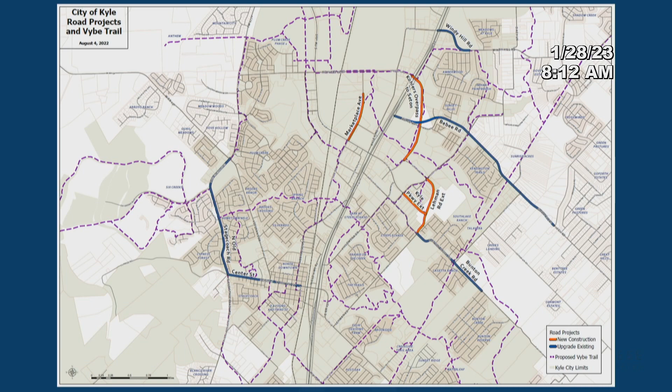And then we always show this map, and you can see that the blue lines, the blue projects, are the ones that involve upgrading existing facilities, and the orange ones are what we call greenfield or new construction projects. It's always a good reminder, we think, to show how the projects are distributed throughout the city.

So again, since the bond passed, we were waiting to talk to council, and we're not doing a whole lot because the feedback we got was that you wanted to engage and review everything. But there were things we were able to do and keep working on that didn't take a lot of time or effort, that would put us in a position to start quickly once we all agreed it was time to move forward. One of those things was we continued to work with the design engineers — those firms selected to do the actual designs — on the draft scopes and fees for the projects.

Now, those aren't complete, but we've gotten them to the point where, depending on the direction we're given today, we'll be able to complete those quickly, bring them back to council for review and approval, and this way we're not losing any more time developing scopes and fees.

We also started putting together a draft master schedule based on the initial project scopes, and we'll finish that once we get started. We'll come back, probably during a regular council meeting or workshop, whatever you all decide, to show you how the master schedule is laying out and what you can expect in terms of not only each project, but also the program as a whole — when projects will be through design, when they'll go into right-of-way and utility coordination, and then when they'll go into construction.

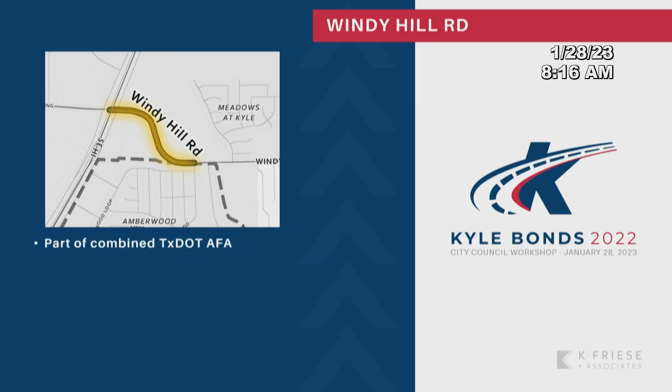Yes, please. For clarification, is Joanne here? I just want to make sure we have the right scope, because I believe from Cherrywood to Purple Martin was already worked on by the county, and Joanne worked collectively with them, so I just want to make sure we're budgeting for the right amount of road.

Sure. Part of what I should have mentioned is, after today, assuming we move forward, we're going to go through and double check all the scopes and limits, and just make sure everything is where it should be. There are lots of moving parts that have nothing to do with any of us that we always have to go back and regroup on, recycle on. Thank you. You're welcome — nope, I went too fast.

So that was Windy Hill, and now we're going to move to Marketplace. This project is going to connect the northern and southern segments of Marketplace Avenue. The existing segment from 1626 to Old Bridge Trail is going to be improved to match the new piece. That new piece will have 2 12-foot lanes in each direction, a median, and sidewalks on either side. The budgeted cost for this project is $11.2 million.

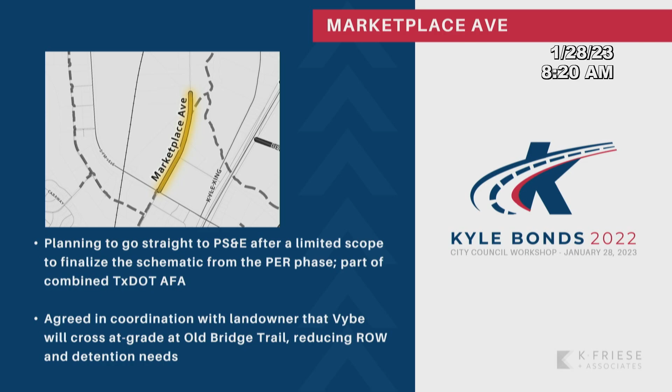This is also one of the projects where the property owner reached out to us and wanted to understand a little bit more about the specific elements of the project. And we sat down with them and worked through a couple of things and figured that it would be best for the project if the Vybe crossed at Old Bridge Trail, because that would reduce the right-of-way needs and the needs for detention of water.

And so we are a little bit ahead on thinking through what this final scope would be. And again, when the city has figured everything else it has to figure out with projects like this, we'll be ready to move forward with that. So again, this is purely from a road point of view. This does not involve any of the underlying land use decisions that will be made.

But the path forward for this project would be to make sure that we try to address water quality. It is not necessarily a requirement in this particular area, but city staff has indicated that they'd like to see if we can build some water quality features into the project. And we want to make sure that city-owned utilities are in the scope. They were included in the cost estimate. We want to go back and make sure that they're included in the design scope and fee for the design engineer. Again, it's an example of all these things we need to tidy up as we go and finalize those design scopes.

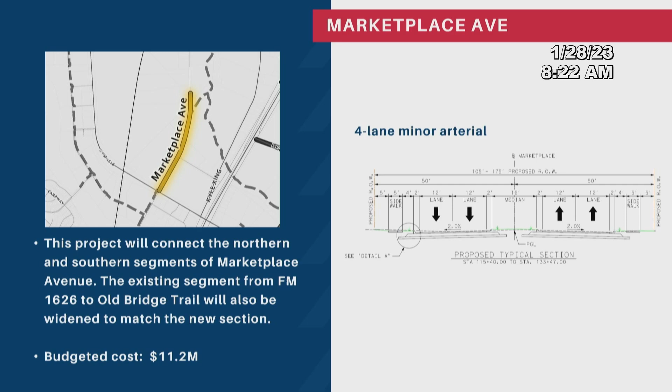Quick question for you. Yes, sir. Just looking back at that Windy Hill, the curvature, is that just a sketch, the way it looks? Will it actually branch a little better, I guess, Y into 35? They're going to laugh because I'm going to use the word idealized. Yes, it's more or less a sketch. The current preliminary engineering report, the current schematic, does have that curve on Windy Hill being made better, being straightened out somewhat. And that will depend a lot on when we begin coordination with that specific property owner. But it does include a somewhat straightening out of the roadway.

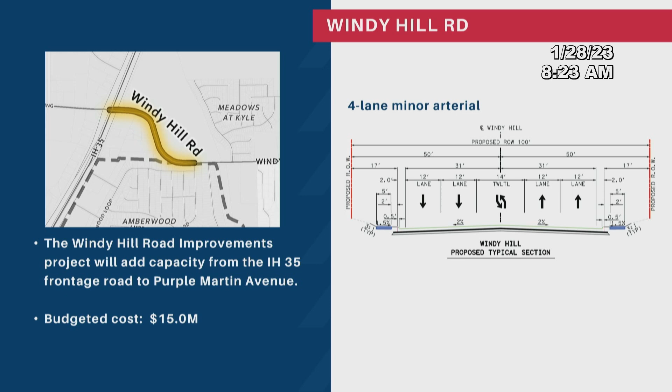And that's actually part of adding to the capacity. When you can remove things like nasty curves, it helps preserve and beef up the capacity a little bit. It's not as good as widening it, but it helps a little bit. Okay, and then it doesn't have sidewalks because, why? Yeah, there are two 5-foot sidewalks. Oh, there are? Okay. And I should have mentioned that, and I apologize. It didn't have it on the sketch. But then we can assume those are sidewalks. Right. Okay. So you'll see that 5-foot strip, and then on others, you'll see a 10-foot strip, and it'll say SUP, which is a shared use path, which is the Vybe.

So next, I'm going to move on to Kyle Parkway, the Lehman Road extension. So this is actually, you can see from the diagram, two pieces, right? The first part of the project extends Lehman Road from Bunton Creek Road to Dacy Lane, and it extends Kyle Parkway into the Lehman Road extension. And the budgeted cost for this is $42.3 million. And you can see that there are two 12-foot lanes, no center turn lane, and then there are two 5-foot sidewalks as part of this project.

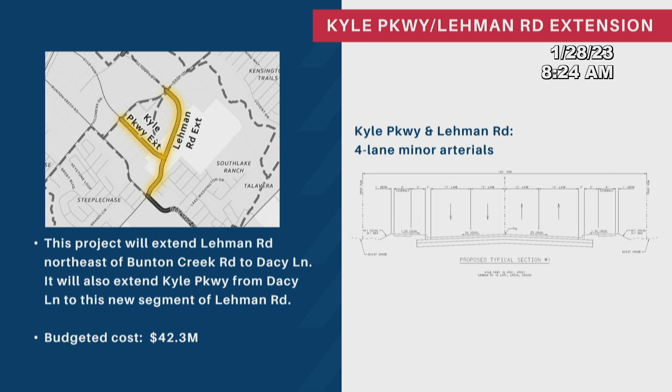This is another project where we believe it can go straight to PS&E. And again, it's a little bit of a cleaning up of the schematic work that was done in the preliminary engineering report. But we don't have to go through the full schematic phase. So again, some savings in time, some savings in money.

And this is a project, and there are a few like this, where the Alliance Regional Water folks are planning a big water line to come through the city and to serve the city. And there are several areas where the ARWA water line conflicts potentially with the road bond projects. And so one of the things we did a couple of weeks ago was begin a conversation with ARWA. Now, luckily, they were aware that the city was working on a set of bond projects.

They were aware that some of the projects would be in areas where they wanted to place the water line. So what we learned is we have some time to better coordinate with them to see how you resolve the conflicts. And in some cases, they understand that they may have to move their water line a little bit, shift it. And in some cases, we might modify how the road crosses the water line or the water line goes under the road. But this is one of the projects where we don't want to wait too much longer because we don't want to hold the ARWA folks up, because that's important to the city for a whole bunch of other reasons.

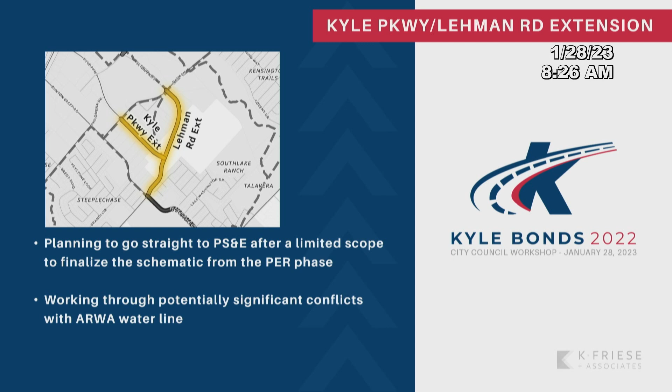So there were two alternatives prepared for this, and you really got to look at those diagrams to understand. But what we're going to move forward with, unless we get different advice, is we're eliminating alternative one, and there is no real big difference in terms of how those two alternatives will ultimately function. There is a little bit of a difference in the alignment and where the roundabouts are placed. Again, it doesn't change the nature of the project or how it will ultimately function, but it does allow us to minimize right-of-way acquisition and interruptions to property owners with the road going through if we pick alternative two.

The other thing we want to do is at the intersection of Lehman and Bunton Creek, there's a planned roundabout. But as we look at this a little bit more, what we're going to do to the scope with the design engineers is add an analysis of a traffic signal. We want to compare what a traffic signal would do and how it would operate compared to a roundabout. And the reason is that it's very close to a school, and roundabouts get built near activity centers like schools quite often, and they function well.

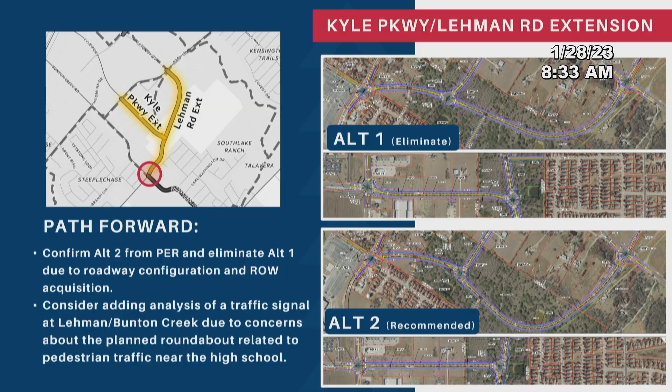Yeah, so they make a good point: the transportation master plan did look at how the whole system would come together, and that's how those projects got on the master plan, and these projects came out of your master plan. So to a certain extent, it's been looked at. Okay. Just one last question. Parkway Extension, is that open green space right now, or is that a road that exists? None of this is a new road through subdivisions, right? Oh, no. We're talking about undeveloped land right now. We call them greenfield. Everything on the proposal is a greenfield right now on this particular project. Not all the projects are, where we'll have to widen what's already there. Exactly. Those are the more interesting projects that are lower on the list this morning. Okay.

Old Stagecoach Road and Center Street, and you'll see in parentheses it says off-system. We're distinguishing between off-system, which is a non-TxDOT road, and then we'll get to the on-system portion. This project is going to improve Old Stagecoach Road from 150 to Center Street, and that is about a $29 million project. It will also improve Center Street from Old Stagecoach Road to Veterans Drive. That is the portion of Center Street that is a non-TxDOT road; it's off-system, and that's why we've separated them. For Old Stagecoach Road, the original proposal was for 2 lanes in each direction and sidewalks on either side, and the same thing with the Center Street portion: 2 lanes in each direction, 12 feet, and pedestrian facilities on either side.

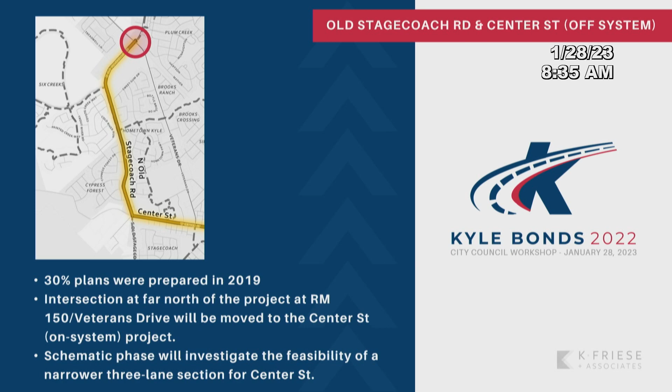This project has a little bit more history because before the bond was brought to life and we were engaged, the city had 30% plans done back in 2019. When we started to look at it, a couple adjustments were made. The intersection at the north of the project at 150 and Veterans Drive was moved to the Center Street project, the on-system portion. We just thought it'd be easier to administer it that way. And as we bring this through, one of the things staff raised to us, and we had started to zoom in on, is that while the city's plan says 2 lanes in each direction, when you go out there and look at Old Stagecoach Road and the off-system portion of Center Street, the right-of-way requirements are extremely intense.

And it would be a huge interruption, more than average, say, to the properties along that. And so one of the things we'll go back and do is see whether or not a 3-lane section makes sense. And our gut reaction is that a 3-lane section, one travel lane in each direction with a center turn lane, will make sense for that when you weigh it against the impact it would have on property owners. You're not going to lose a whole lot in terms of operation of the road because of the center turn lane.

But again, when you weigh that against the fact that that is, for the most part, a residential area, there's a lot of activity on it. What you don't want to do is add the 4 lanes and then just sort of have a devastating effect on the surrounding properties. So we are leaning toward a 3-lane section, although the initial schematic was done showing a 4-lane section. And that's something we'd like you to be aware of: everything else being equal, if we're left to our own, we will knock that down probably to a 3-lane section.

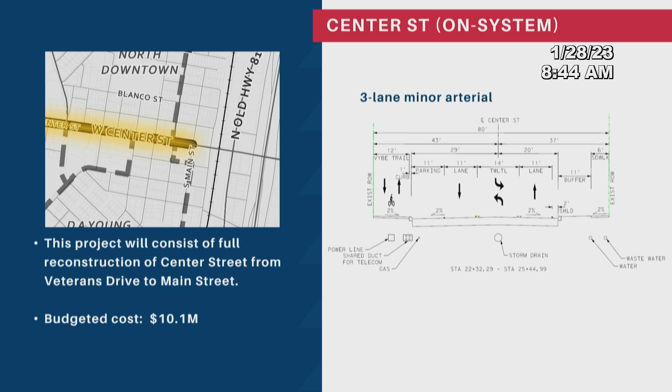So this is the on-system part of Center Street, and it's an existing road, and it is a full reconstruction from Veterans Drive down to Main Street, and the budgeted cost for this is $10.1 million. It has a center turn lane. It has 11-foot lanes on either side. It has parking on one side, and then there's the Vybe Trail on one side and a sidewalk on the other. Yes, Councilmember.

Before we move on, going back to Stagecoach, I think we all have concerns, one way or another, whether we take it down or leave it up, over the tree. And so I just want to make sure that there's going to be some kind of solid outreach when we decide what the city's going to do with that tree. And I want that to be addressed one way or another. I get it's a touchy subject, but if we don't talk about it, that's not a solution.

It will be part of the conversation.

Up until a while ago, I lived in Hays County, and outside of work I spent a lot of time in the area around Kyle. Personally, I'm aware of the tree, but it is going to be an issue.

There's no way getting around the fact that there's going to have to be a very open and honest discussion about the tree. But none of these projects are going to proceed through design and go to construction without coordination with the community. I don't want to get into that right now because we don't have that plan laid out. What we're thinking for coordination is that, with council's blessing, we'll engage the community in general to give them updates about how the bond program is going as a whole. Every project will have a certain level of coordination, and we fully expect that when we start with Old Stagecoach Road, we're going to have a conversation with the community and council about the tree.

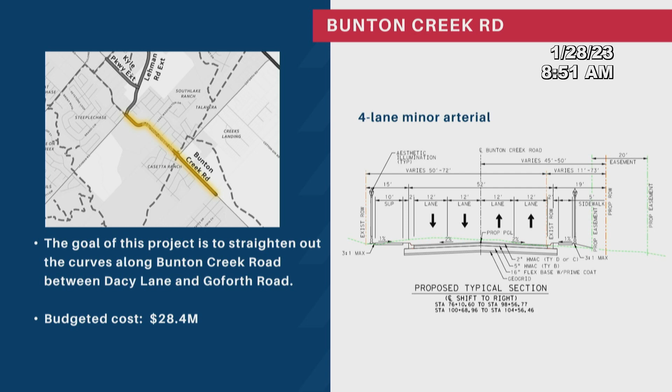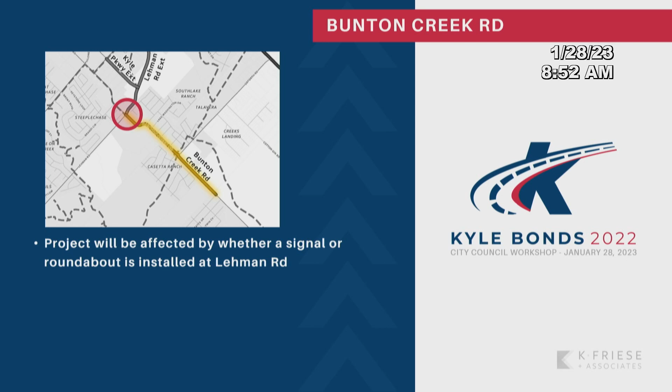For this project, if we go back to the Kyle Parkway Extension, Lehman Road Extension project, where the Lehman Road Extension hits Bunton Creek Road, the decision on whether a signal or a roundabout is installed there might affect this project a little bit. That's something we'll take care of through the natural course of design, depending on the decision made on the Kyle Parkway Extension, Lehman Road Extension project regarding that intersection, we may have to modify that end of Bunton Creek Road a little bit.

That one, since it doesn't have a dividing median, is there more of a public safety concern, because now you've got cars going in opposite directions at high speeds? A lot has to do with the context and the circumstance. One of the things we'll do is make sure that doesn't happen. The Transportation Mobility Master Plan called for that, so we're trying to honor it, but if we dig into it a little bit and think something else should be different, we'll come back. I've seen cars swerve over to the other lane, and then they're heading straight into each other. That can even happen with a median, but you're correct, in some circumstances it could increase the chances. You've got to look at each road as to where it exists and what it's going to serve.

I just need to point it out to let you know I'm aware of it. I'm addressing it, I'm looking at this. So if we do this, and down the road there are these accidents, I did bring this up. I was aware oncoming traffic could come at a fast speed.

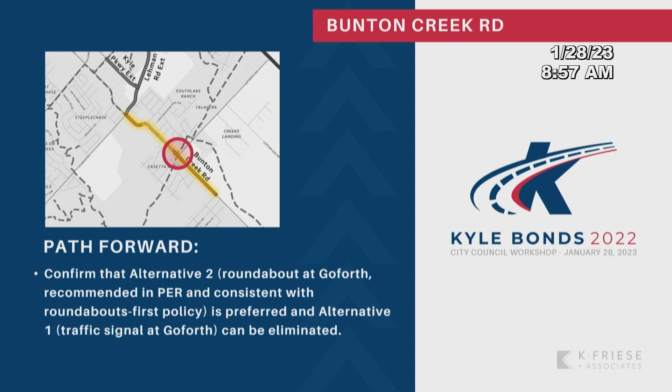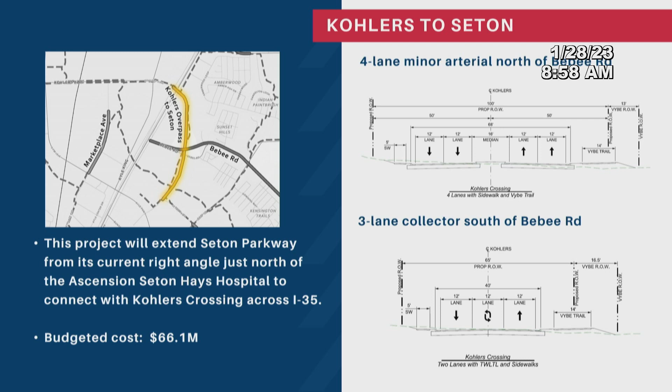Now we're going to move onto Kohlers to Seton. This project involves, if you are on the west side of I-35, a crossing of I-35. I think the city would prefer, and most folks would prefer, that Kohlers stay more or less at grade and that I-35 go over Kohlers. From TxDOT's point of view, we think they agree that's probably a good idea because they're doing it up and down I-35. But to get there, they need an analysis done that will get done through the schematic design. So the first part of the project, although it's presented as one, is dealing with how Kohlers either gets over or under I-35. The second part of the project is when you get to the east side of 35, and you come down what we all know as the Caraway Tract. You cross Bebee, and you go all the way down to Seton Parkway.

This is why we're saving it for lower down the list - it's a pretty complex project, and it's complex because I-35 is an interstate, and whenever you start to work in or around an interstate, TxDOT and the feds get a little anxious because, rightly so, they're very protective of that road, because that road has implications way beyond here. That's why it's pretty complex, and I'm going to get to some of that in a second. The budgeted cost for this is just over $66 million.

So, as part of the city's ongoing coordination with TxDOT, before the holidays, we were part of a meeting with TxDOT to talk about the bond projects. Part of that meeting was to talk to them about the projects that were on system and the projects that connected, and to figure out the best way to handle them. So when we were doing those advanced funding agreements, would we do one agreement to cover everything?

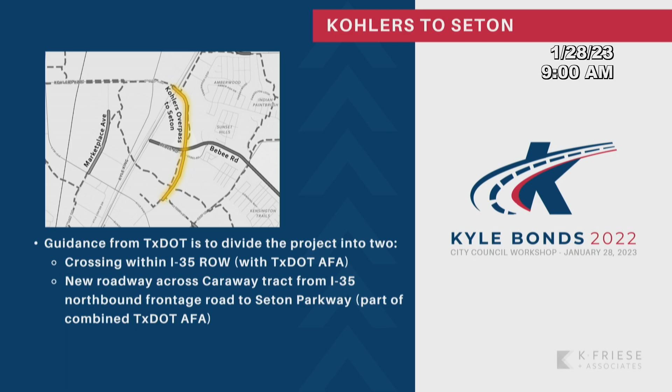When we drilled into the details with TxDOT, there were a couple of things they verified for us that we knew were out there. To touch I-35, either to bring I-35 over or to bring Kohlers over, because you're touching the frontage roads and crossing I-35, there is an approval process that can take anywhere between a year and 2 years. So to keep this project together, you would be delaying everything else, including the piece through what we call the Caraway Tract. You'd be looking at a 2 or more year design process to get through what you have to get through with TxDOT.

So what TxDOT recommended, and we agree as a technical team, is to separate the two projects: treat the crossing of I-35, not yet determining whether 35 goes over Kohlers or the other way around, separately from the piece that will connect from the frontage road through the Caraway Tract all the way down. That is the way we'd like to proceed. Again, launch I-35, launch the Caraway Tract.

So the path forward, and I think it bears repeating: divide the project into two. The I-35 crossing, and then from the I-35 frontage road all the way down to Seton Parkway. What we're doing is eliminating the second alternative included in the PER, which is to cross I-35 at Bebee instead of Kohlers. Looking at the city's desired development plans, it just makes perfect sense to cross at Kohlers and bring the road down. So that is the project.

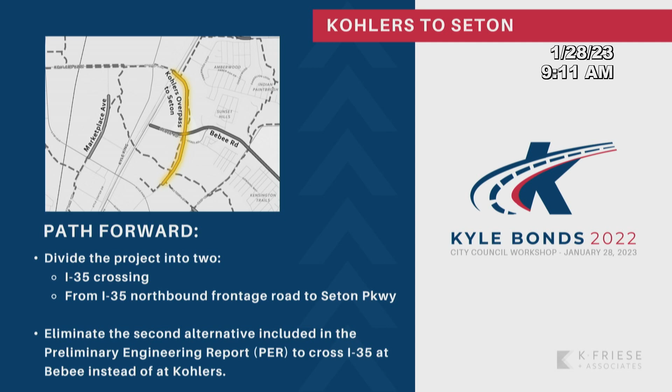So I'm going to take another breath. Could you go back to the next slide, please? The real one, that one? No, the one that had the proposed. That one? No, after that one. One more? Yeah. And is there a way that you can send that to us as a PowerPoint presentation? Oh, absolutely. Thank you. I'm just trying to match what I have in the real map to figure out what the plan is gonna be.

And I guess, Tanya, didn't want to interrupt. Did you have a question? I just wanted to see what is that green section that you have in there in the road? The one that is connecting to, oh my God, I hate that I cannot zoom in here. That green, what is that? Is that just a connection to the old Bebee Road if we were gonna leave it in there? If we were to go with alternative two, would that be gone? It's to provide connection to that development. Because if you move Bebee Road out, you still need a way for those folks.

Okay, I guess my question will be, going with alternative two using part of Bebee Road, the pre-existing road, maybe adding that roundabout in there, what will happen to the rest of that curve where Bebee currently is? The green part is what's needed to provide local access, right? The part between the roundabout and the green part could be taken out, could be abandoned. Okay. Now, what happens to that, we haven't dug into, but it wouldn't be needed if you provide that connection from relocated Bebee back into the subdivision. All right. You guys are the engineers, I know you will figure it out. I was just wondering, but thank you.

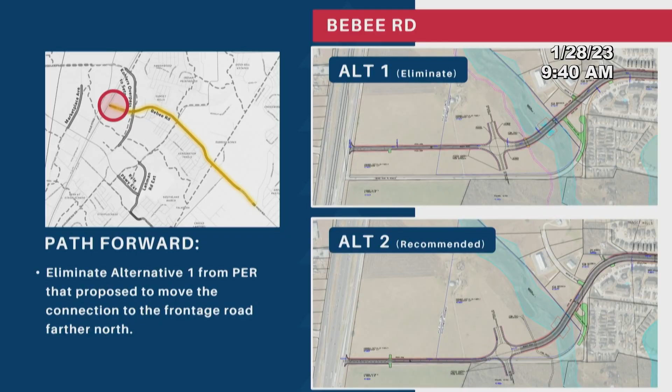Councilman Zuniga. Thank you. So, on the Bebee Road and the Lehman pictures, proofs, you did a really good job on showing us what it would look like. So then I was able to catch that I would not like to see a road side by side next to another road. But on all the other bond roads, you didn't provide us that level of detail. So are we going to have that opportunity to see it again in a fashion like this?

So why did you not bring that so we could see it visually? Because I'm having a hard time with that. 35 Caraway, what is that going to look like? But when I saw these here, I can see your roundabouts, how they're going to go, what the traffic pattern could look like. And I'm a little disappointed that on the others, I don't see much other than there used to be a road and it's going to get a little wider. And so this is what I wanted to see, right? Like this kind of stuff right here.

Well, I apologize for that. And it's probably my mistake. We had been through all those more detailed schematic designs earlier in the process. And I guess I lost sight of the fact that we have a couple of new council members. But I can offer you this. If you're on your way out this afternoon, you could... If I missed something, or is this the first time I'm seeing this? ...that you weren't given the opportunity.

Because when I saw the road bond, I think I just saw maps, right? But now you actually brought more realistic infrastructure. And so we're at that point now where we should start to see what it looks like. And I think on Bebee, you hit it right on the bullseye. That's what it should look like. Well, the road design is not done yet, so. Right, the designs are not done, but this is kind of looking at what the designs and intentions are already.